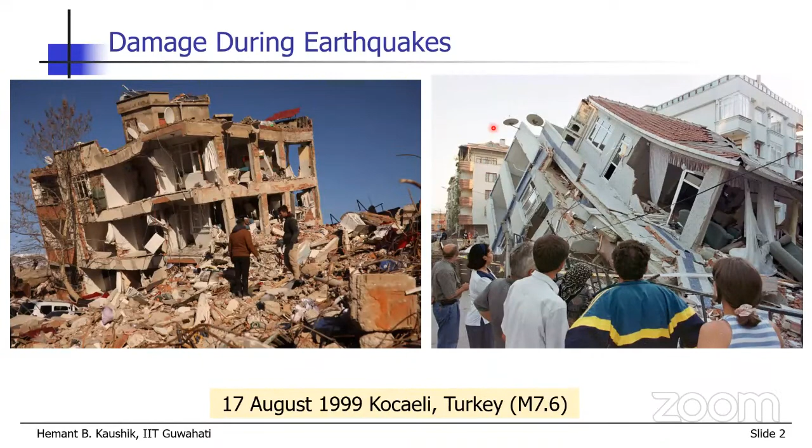Then, along the same lines, in 2001, our Bhuj earthquake opened our eyes, as if we were thinking that such big earthquakes cannot happen in India. But then this earthquake resulted in, again, a lot of development in many aspects in the country.

Then happened a very large earthquake, one of the biggest earthquakes that humans have experienced so far, magnitude 9.3, this earthquake in Sumatra. The earthquake was so big that even some buildings in Port Blair, which is about 1100 kilometers away from the epicenter, collapsed. Plus, there was huge damage to infrastructure.

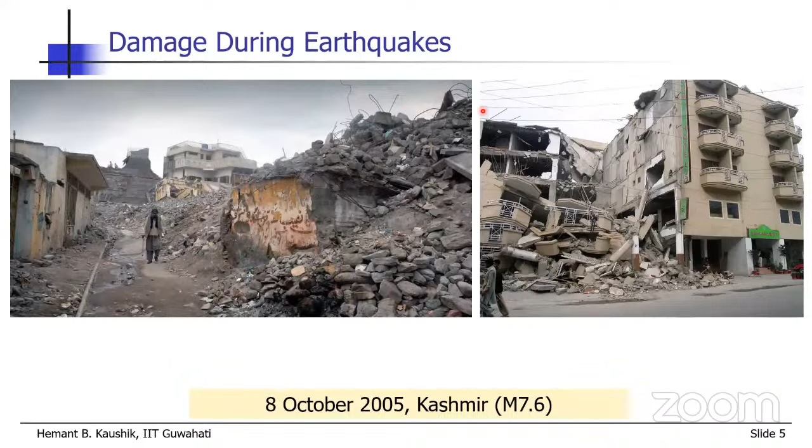Then in 2005, another big earthquake occurred in Kashmir, and we saw what happened to all these unreinforced masonry buildings and even the apartment buildings, similar to the Bhuj earthquake.

In 2006, there was a very small earthquake in Sikkim of magnitude 5.4, which was followed by a bigger earthquake of 6.9 magnitude in 2011. So we covered both of them, and the structures which we identified as vulnerable in 2006 were all highly damaged during this 2011 earthquake.

And in 2015, Nepal, you see there were two earthquakes, but on 25th of April, the 7.8 earthquake created havoc to all building typologies, being RC buildings, the unreinforced masonry buildings, even some of the local typologies and heritage structures - all were damaged to a very significant extent.

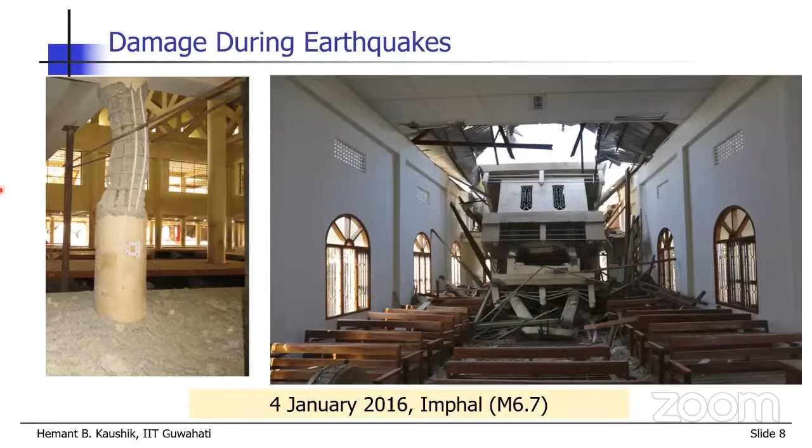In Imphal, there was an earthquake of magnitude 6.7 in 2016. That resulted in huge damage, even to this very famous women's market in Imphal city. And this is the church building which got damaged.

This was followed by a very small earthquake, not in terms of magnitude, but in terms of effect. This was in Assam, Sonitpur, in 2021. Though the local magnitude recorded was 6.4, the damage was not much, but there was huge liquefaction in the area. You can see the liquefaction that occurred in a large stretch of land near the Brahmaputra banks. Otherwise, the structural damage was very limited during this earthquake.

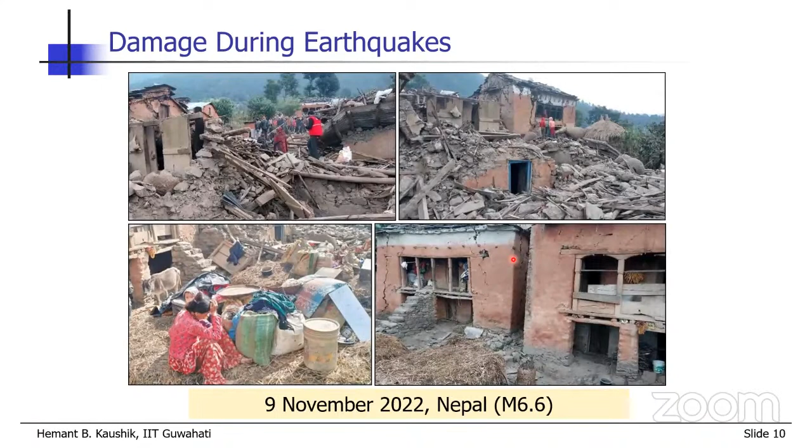In 2022, another earthquake occurred in Nepal, magnitude 6.6, which resulted in huge damage again to unreinforced masonry buildings, all sorts of unreinforced masonry buildings. And finally, this 2023 double earthquake occurred on the border of Turkey and Syria. The location was different than the 1999 Turkey earthquake, but the damage, the death toll, the economic damage was huge, comparable to 1999. So the question now people are asking is what they have learned during this last 24 years.

I'll ask a different question. The question is, which buildings have performed better during these earthquakes? We have seen hundreds and thousands of photographs of building collapses, of huge damage to different infrastructure. But are there any buildings which have performed good?

In Turkey, for example, there are many vernacular housing systems. Out of them, particularly two systems perform better compared to reinforced concrete buildings and unreinforced masonry buildings. These are the Himiş construction, both of them. You can see the difference here - these are unreinforced masonry buildings otherwise, but they have large numbers of timber vertical and horizontal elements, as well as bracings, the diagonal elements. In between these timber elements, the wooden elements, they fill the masonry with different types of material. It has been found that these buildings performed better compared to other buildings, so the damage was limited.

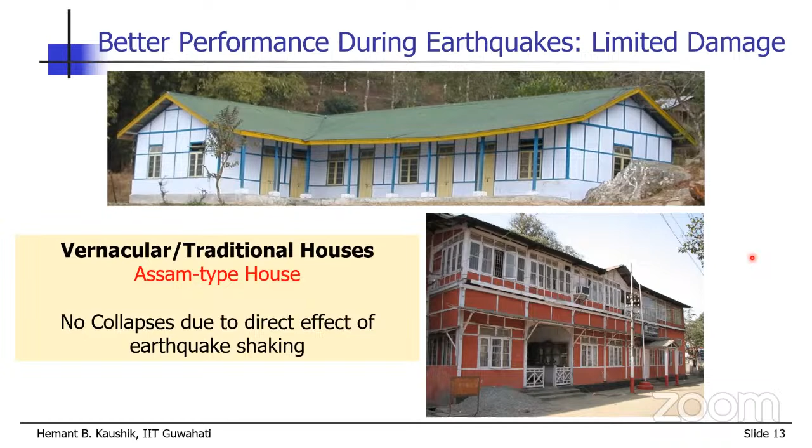Here you can see the comparative damage to this Himiş building versus a reinforced concrete building. Assam type housing, found across the Northeast, is the only building type which has not seen any collapses in its history. There is no documented evidence of these buildings collapsing due to the direct effect of earthquake shaking. Though there is some damage, which I'll discuss later. These are very minimum, negligible damages that these buildings suffer because of the direct effect. When I say direct effect of earthquake shaking, I mean there are some damages and collapses reported because of landslides or flooding, but not because of the earthquake shaking itself. You can find single-story and multi-story buildings of this type, large numbers across the entire Northeast. So these are the only buildings that have not seen any collapses.

Now, which building types are most common? Looking at several photographs showing how different buildings have performed during different earthquakes, what we see is masonry is the common construction material in all these buildings. In India, we have the majority of the building stock constructed using unreinforced masonry (URM), and there are many reasons for that - they are easily available, economical, among other reasons. So in any city in India, developed or developing, we find masonry there.

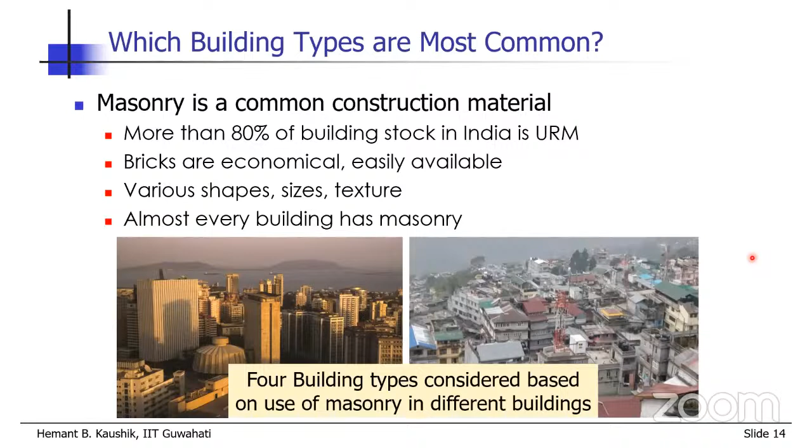The first building type that I considered is, of course, the masonry infilled RC frame buildings, which all of us love a lot. Second is the unreinforced masonry buildings, which all of us have simply forgotten, in the sense that the good construction practice has been forgotten, but of course we are constructing these buildings.

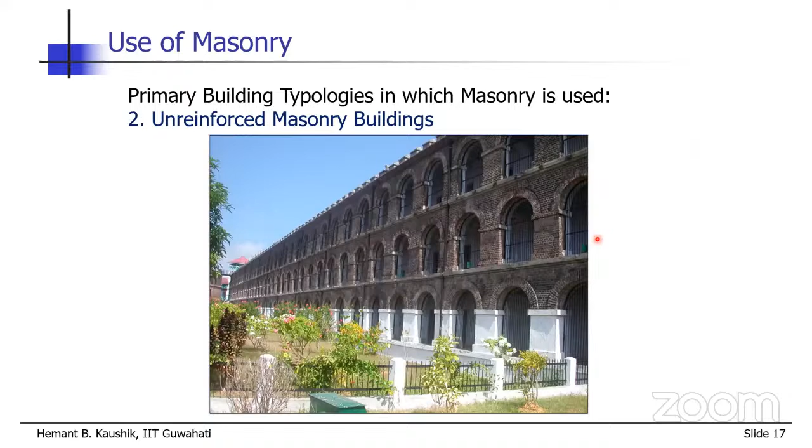The third type of building is the confined masonry buildings, which are very popular in some of the countries where earthquakes are very common. For example, Chile and some of the European and Latin American countries. These buildings have performed really well during these earthquakes. But I have not shown these buildings as better performing in Turkey and some Indian earthquakes because they are not commonly constructed there. And finally, the fourth type is the traditional vernacular building.

Particularly Assam type or the Ikra houses that we will consider. Here also the masonry is used below the sill level, so only this part is masonry. Though there are some other systems, the Dhajji-Dewari and Taq, compared to Ikra type houses or Assam type houses, these buildings have not performed that well, though they performed better. So we'll just consider one traditional building type, which is the Assam type house.

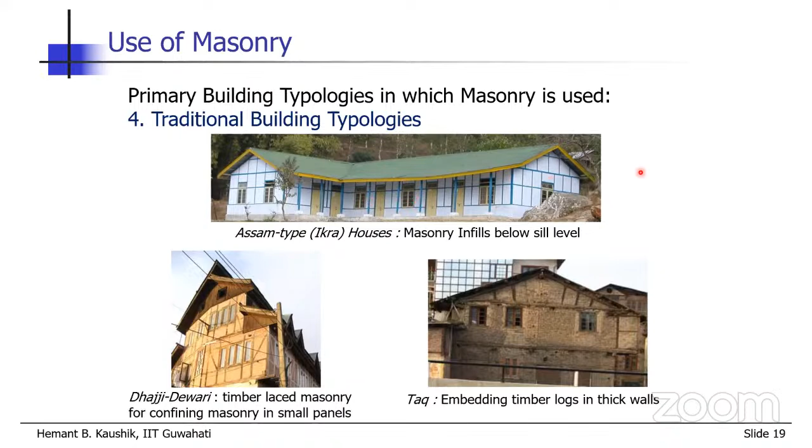We have done large scale testing of many building typologies, all these four and then some others, but I'll show results for four. I will show you some test results, not in terms of numbers and mathematics, but in terms of how they perform, some of the videos. Then we will compare how the strength is, how the lateral drift is, how the lateral strength is compared to the other building systems.

This is how we tested this wall. Basically, slow cyclic testing loads were applied at the slab level of this frame, and a lot of sensors were used to record the performance. Let us see this video, how this frame, single frame with full infill, performed.

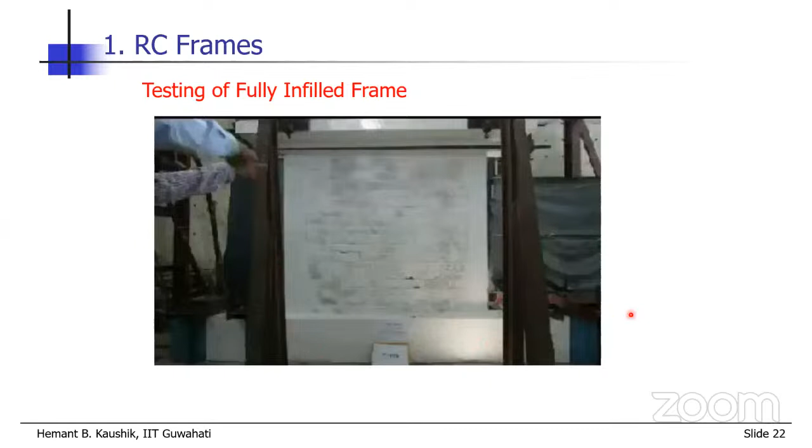The loading is applied here, and it was applied very slowly, so that it takes roughly 2.5 hours to complete the single test. But I will be showing you the video in very fast forward manner in about 30 seconds.

If you can read this number, it shows how much displacement is applied at the top here. You can see the cyclic loads are applied. Basically, we are applying the displacements. Here we have applied so far 20 mm displacement at the top, meaning 20 positive and 20 negative, so this side as well as this side.

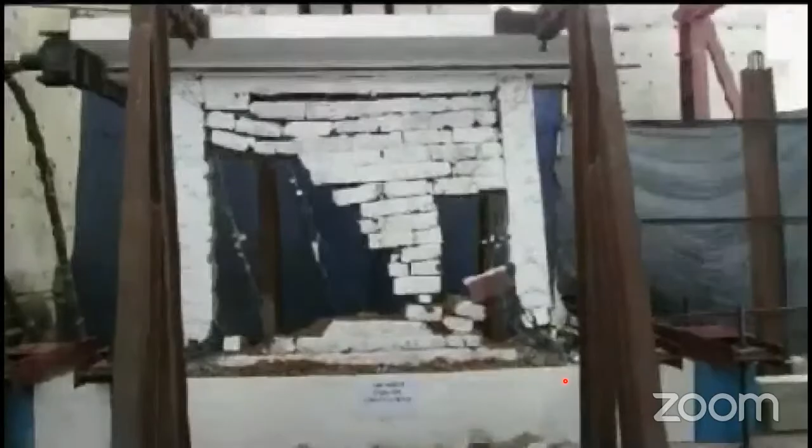You can see here immediately within 20 mm, 30 mm, you have huge cracks in the walls. There are some cracks in the columns, beams. At 40, 50 mm displacement, you will find that these columns will actually damage so much that all the concrete will go away. Now the wall will also start collapsing in the out of plane direction, and the entire concrete has fallen off from here. This means all the bars have yielded. Finally, what you get is, of course, we have supported this frame in the out of plane direction so that it is not collapsed.

Now if you compare this with the infill frame, obviously you will get very high stiffness and very high strength, but the ultimate displacement at which it fails is actually reduced drastically. It fails at around 4% drift. But in case of bare frame, even at more than 5% drift, the strength was not reduced significantly. With a significant opening, of course the strength reduced compared to the fully infilled frame, and the failure occurred early.

Remember these results, we'll come back to them when we compare all 4 building types.

So the next type is the unreinforced masonry buildings. Again we consider first the 3 walls only. These are not buildings, but only 3 walls. First is full, there's no opening. Second wall is basically with a door opening, and third is a window opening.

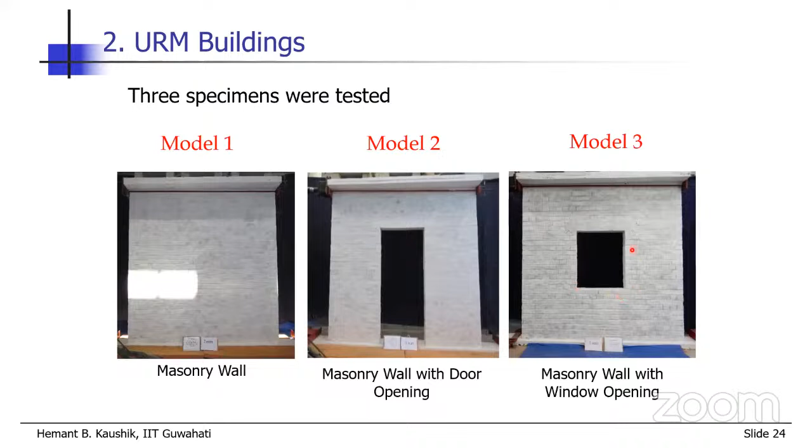Now you'll find this video very interesting, let me see if you can find any damage in this wall. The same setup is there. We are applying displacement at the top, and the displacement is shown here. It is expected that cracks will start emanating from this region or this region and at the bottom, because...

...this is the region of high stress concentration near the opening. So we have reached about 4 mm, so far there is no crack. But if you remember the RC frame infill, there were cracks even at 4-5 mm. Here you can't see any of these things, but then immediately there is a failure.

I'll show you why I'm calling this failure. You cannot see actually anything, any damage or any deformation of the wall. That is because it simply failed at around 8 mm displacement, which is so little to observe, particularly in a small video, you cannot observe it.

More interestingly, there is no ductility here, it immediately failed. So it was a very brittle failure, immediate failure. So here we are showing this wall. It failed at around less than 6 mm displacement. We're not talking about drift here. And this is a full scale wall, 3 meter length, 3 meter height.

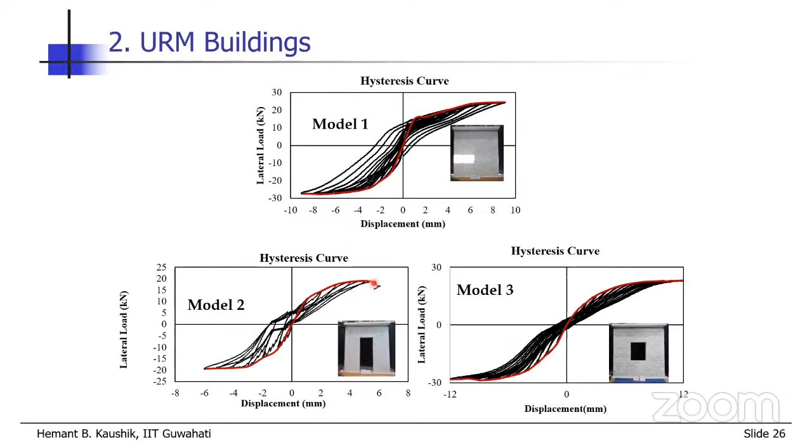Then what we did, we tested the entire building. It's a full scale building and it had 4 walls. 2 walls were having window openings, 1 wall, this front wall, has a door opening. So let us see how this building performed.

The same test setup was used. The displacements were applied cyclically at the slab level. This video shows that we have applied 19 mm displacement so far, and you can see the rocking behavior that is occurring in this wall.

Rocking means this part of the wall is actually dancing over the bottom part. That is because the continuous crack that has happened along the whole length of the building at this level, starting from the opening here. That is what I was mentioning, because this is an area of high stress concentration, we generally expect the cracks here. Also you will find some cracks here at the bottom, that is also very common.

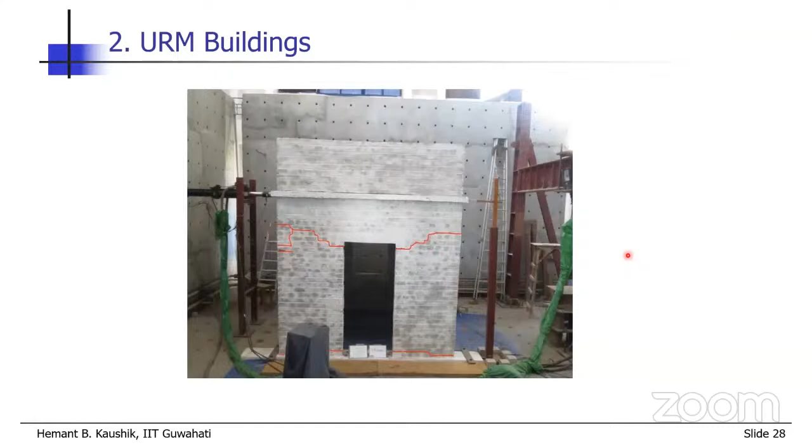So when you compare a single wall with the entire building, at least you can see some of the displacements. So people will get some time, but not as much as we find in case of RC frame.

So the third building typology is the confined masonry. I'll just spend 2 minutes to explain what is confined masonry to those audiences who have not heard about it. So here is the RC building with infill. What we do here, we construct the frame first, RC columns and beams and slabs, and then we fill these open spaces in the frame with masonry infill.

So when we do that, we don't expect that these masonry walls will resist the vertical gravity load that is coming on the slab, because these beams and columns are designed for that purpose. Also, we don't expect that these walls will resist any of the other loads. We don't design them for that purpose.

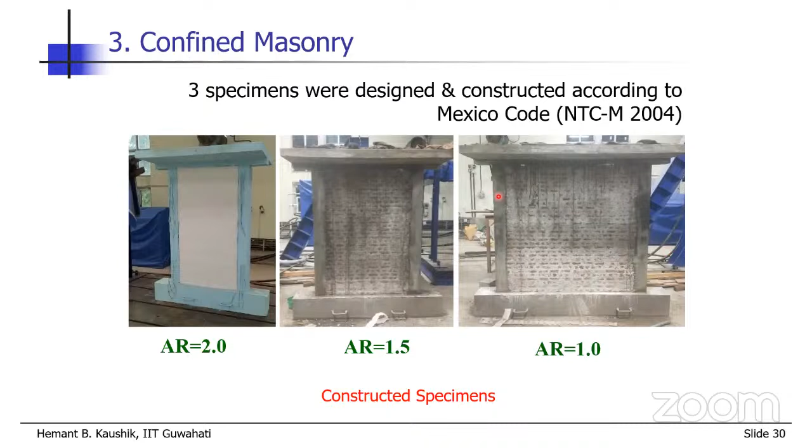I'm showing you results for one specimen for aspect ratio 2. Here you can see lateral drift 0.75%, 1% lateral drift we have already applied. Looking at this, the performance-wise, it appears to be quite similar to masonry infilled RC frames. But when I say similar, that is a very big statement, because these columns are not designed to behave in a ductile manner. Still, I'm saying similar. So that carries a very large weightage.

Now let us see how these frames perform. These are scale frames, not the full scale. So these are 3 frames. You can see that when the frame aspect ratio is reduced, the damage scenario also changes completely. And that is why we tested 3 frames.

Finally, the Assam type wooden housing. So we first tested some frames of these buildings. The first frame is without any infill.

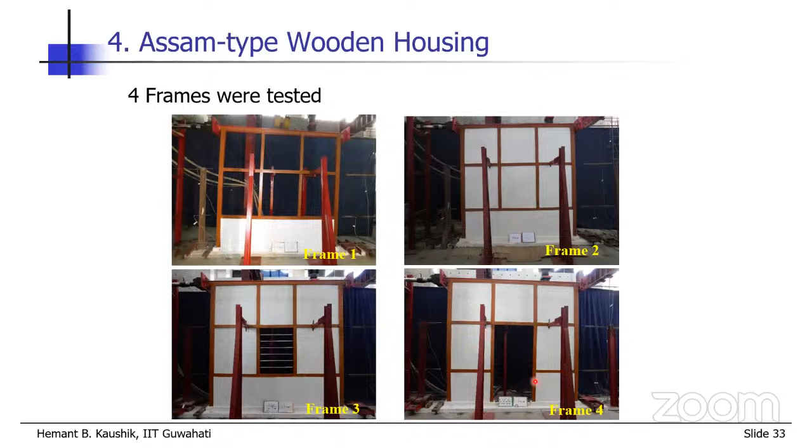Just to see if there is any influence of these Ikra walls, this infill, on the overall performance of the wooden frame, we tested these 2 frames. Then we inserted one window opening and again a door opening. Similar testing was carried out.

Let me show you this video again. What I want you to please concentrate on is this connection here, the vertical alignment between these 2 members. You can see what happens to that alignment when I apply the lateral displacement here. Plus, remember, this is a normal masonry infill wall, and these are the bamboo strips, Ikra. So just compare these two walls.

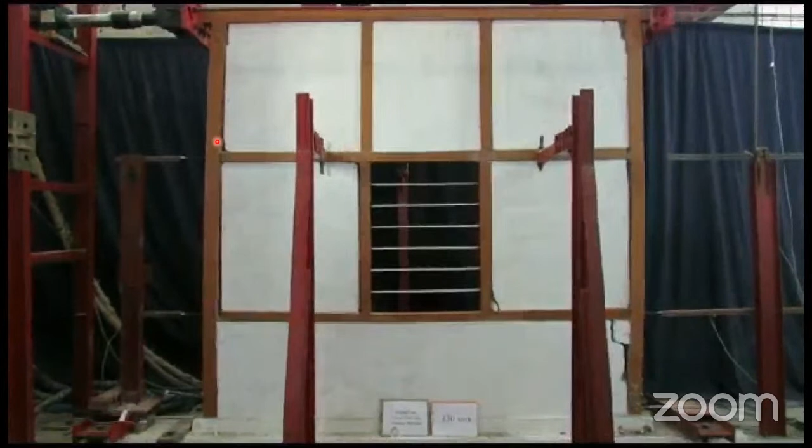Then you see the video. So we have already reached about 20 mm, right? And at this 20 mm displacement, you can find our masonry infill wall has cracked, which is expected. But there is no other crack, no other damage to the entire frame. Though there is some separation here at different locations, that is fine. So there is some small crack here because of large separation.

Look at the displacement. We have almost reached about 140, 150 mm, which is huge.

Again, this is a full scale frame, height is 3 meters. Now you can see the Ikra wall, how does it look like? These are the bamboo strips. Look at the vertical alignment of this connection, which I mentioned. There is no alignment. The connection is broken because it was so weak and flexible, using only nails. So the point I'm making is these buildings are really flexible.

They allow displacements, and you see up to what drift level we have actually gone with this building, this frame. It loses some strength because of the cracking and failure in the nails, but then the load is redistributed to the other members. Some strength reduction occurs, but then it increases again. This happens all the time, up to 8.5% lateral drift. We couldn't test it further because of our testing limitations, but it was behaving very nicely up to that point.

Compared to this frame, which had no Ikra walls, you can see the huge influence of these Ikra walls on the frame behavior. Then the influence of openings was also studied. The behavior of this frame with a window opening was quite better compared to even the frame without any opening, and the reason was that even the presence of these small steel members enhances the performance.

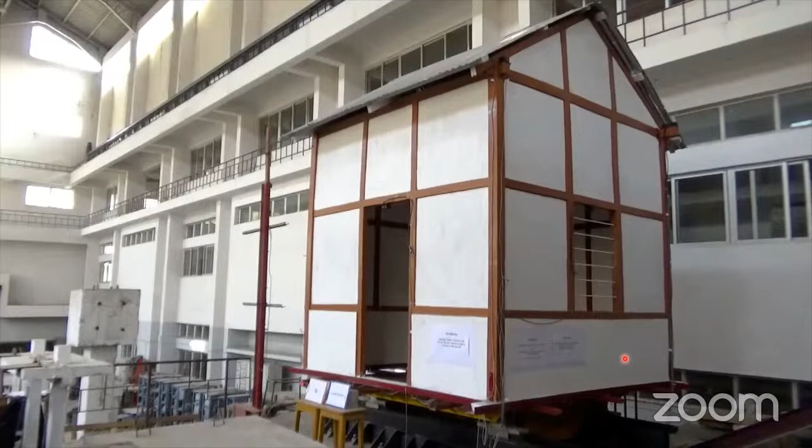Then what we did, we tested the entire building on a shake table so that we understand how these buildings behave so beautifully without any damage during earthquakes. The result I'm showing is for the Taft ground motion, scaled up so that the peak ground acceleration was 1g, which is very high. Let's see if you can identify any damage to this house. It's a full scale house.

It was instrumented at various levels. Accelerometers were placed, and on this side there were LVDTs. Strain gauges were placed at the foundations. At least I don't see any damage to this building from the video, and as I said, this was a very big earthquake, with 1g as the peak ground acceleration.

So what we did, we tested the same building with different ground motions at different intensities. In total, we applied about 112 ground motions, but there was no significant damage. Actually, the damage was so negligible that we couldn't damage that building at all. So finally, we shifted the same house specimen and applied slow cyclic loading, like we did when testing the individual frames.

Then you'll be able to see some damage to this building. The displacement applied at the top cyclically is shown here. This has reached 20 mm, no crack, nothing at all, anywhere, like in the single frame. These are the masonry walls, these are the Ikra walls.

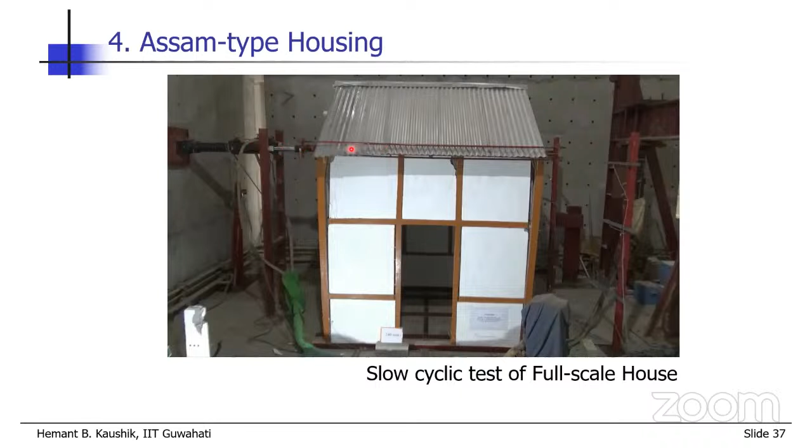Then what we did, we removed this house and changed the setup so that we simply kept pushing this house in one direction for about 500 mm. Then this house actually got damaged. Now you can imagine this height is 3 meters, 3000 mm, and we had to apply 500 mm displacement at the top to fail it. This is a huge displacement.

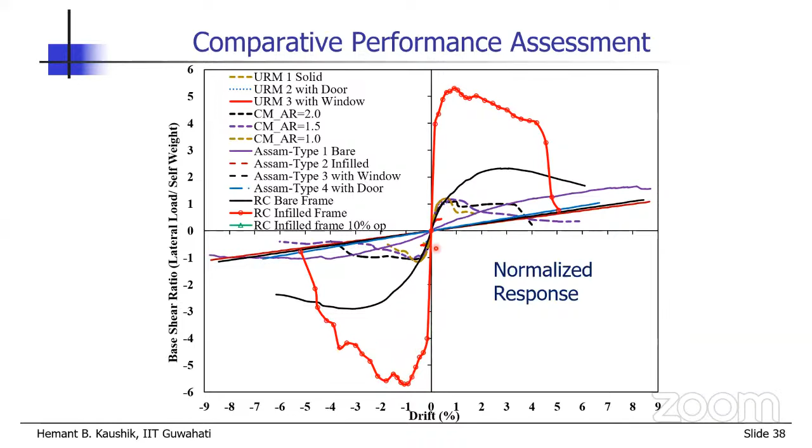And look at where the masonry infilled RC frame is compared to all other building systems. There's huge stiffness, and that is the reason we find immediate failure of these infill walls. As soon as, because of the high stiffness, it actually attracts a lot of loads during the earthquakes. But anyway, because we are normalizing the response, it appears to be quite good.

And this is the RC frame, 10% opening. So these are all the frames that we have studied. And if I ask you which one is the best, it's a very difficult question to answer. But if I ask you which one is the worst, it's the simplest thing you can answer, that these 3 frames, the unreinforced masonry, are not behaving up to the mark. But unfortunately, the majority of our structures are here. We are constructing these, right? So the idea is to at least convert these to the confined masonry, or to this vernacular traditional housing.

So that is all from my side. Finally, the risk mitigation strategies for the future, basically there should be no surprises. What we have to do is improve the construction practice, use construction materials wisely, and follow the design codes.

Now, out of the 4 typologies, which one should we adopt? Well, we can adopt any, as long as we use the design codes properly, use good materials, and the workmanship is good. But unreinforced masonry is not recommended in high seismic regions. We have to use reinforced masonry, and using reinforced masonry is difficult. So there's a concept of confined masonry which we can use.

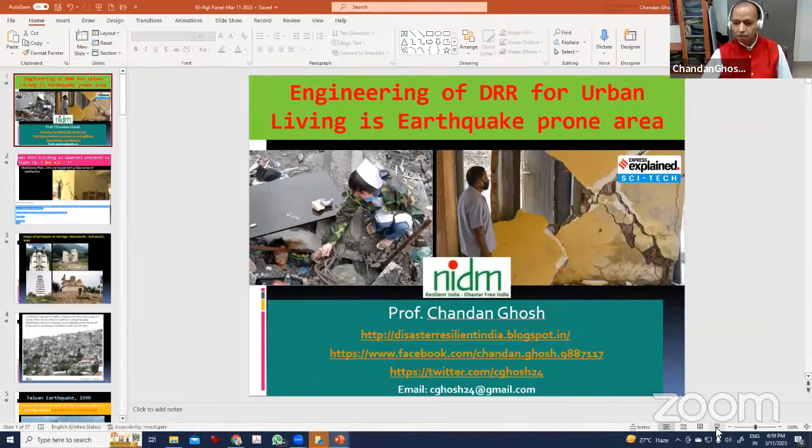Now let me take something on this area. Let me put up my slides quickly. Is the slide visible? Yes, absolutely fine. So the first thing is a photograph of a person, maybe a government official, looking at a structure to see how it has failed, and finding out the reason behind that. Earthquakes can make such an impact on our buildings where we have invested a lot.

Being from the engineering fraternity, we have to keep evolving technology, codal provisions, and guidelines, and all these things that are available, to enforce them and put them in our buildings. That is how we look at it.

So what I'd see is that by looking at buildings after things have occurred, like the Sonitpur earthquake last year, there was some damage but not much. But still, being an engineer, how far are we from the actual performance of the building under the conditions of an earthquake of 6.7 magnitude, and how did this building fail? There is a gap between just seeing the photograph saying it has failed like that. There needs to be a connection set in between, like in the last lecture, the performance, really which one is doing better, through laboratory tests and also field performance.

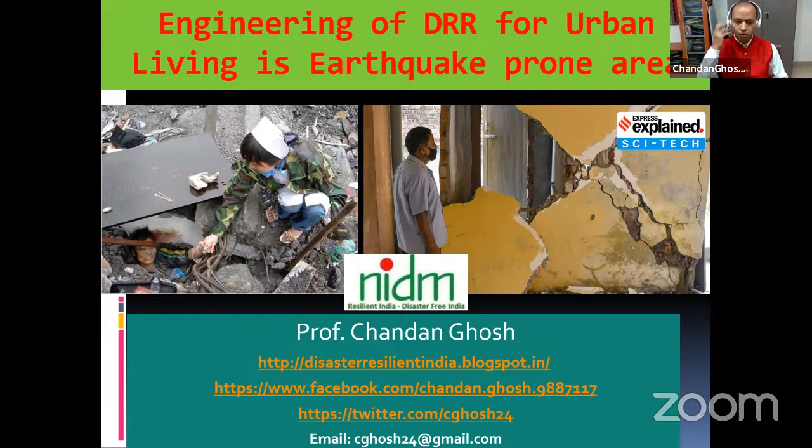So it is not that only from the structural side we are looking at one particular aspect - the structural behavior of the building, and checking whether our design performs safely as per our design. But here, when life is involved, performance is also involved. And then it comes again as an onus on us, how we look at it going forward.

When we see such kinds of cracks, again, there is no formula, no software. To bring a building which is broken in this manner, it is not possible to correlate with any formula or computer simulation that it is going to crack like this. But there are designs and constructions being done which exactly perform the way that it is designed and constructed. So that kind of performance study and tests are also being done.

This is in Guwahati after the Sonitpur earthquake. You will not find any building in Japan without any crack, in fact, because it is the most earthquake-prone area.

But while seeing cracks in this manner, we do not have any mathematics to define how cracks are going to come, or how the displacement curve is going to happen. It is quite impossible, because of the kind of bars, members, connections, filler walls, the entire beam-column junctions, and the kind of reinforcements that are there. We can simply say we have no control on that. We give them in the design, but if it is not placed properly - see the geometry, see the quality - that is the kind of cracks being seen over here.

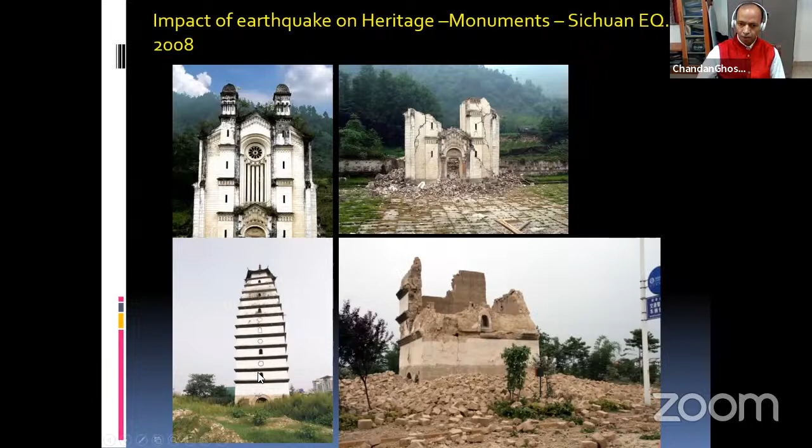There is no such medicine, no such retrofitting tool that can be devised, because the cascading effects and other factors would be very, very dangerous. And since we are not able to fit any mathematical equation from before to after in this way, no stochastic simulation is possible.

The same will be the case for such buildings in Zone 5 areas, because these are steep hills and we cannot do much about it except taking care. Just saying that nothing can be done in a national seminar like this is also not the way to deal with it, because so much investment and public interest is involved, and people are living there.

So in order to safeguard such facilities, I think our research pursuits, experiments, and judgment, along with the huge funding being allocated to each state including Tripura from the National Disaster Response Fund to retrofit a few clusters of buildings in Agartala, the Northeast states, or the entire country including Delhi, our professional judgment as well as the tools and techniques available even globally, there is no complete answer to that.

But we cannot sit idle. That is why we have to check at least the vulnerability of these buildings, especially since individually each building is made with RCC following code and other requirements. But when built in this manner, one above the other, the cascading effect will be really unpredictable and cannot be simulated in any computer.

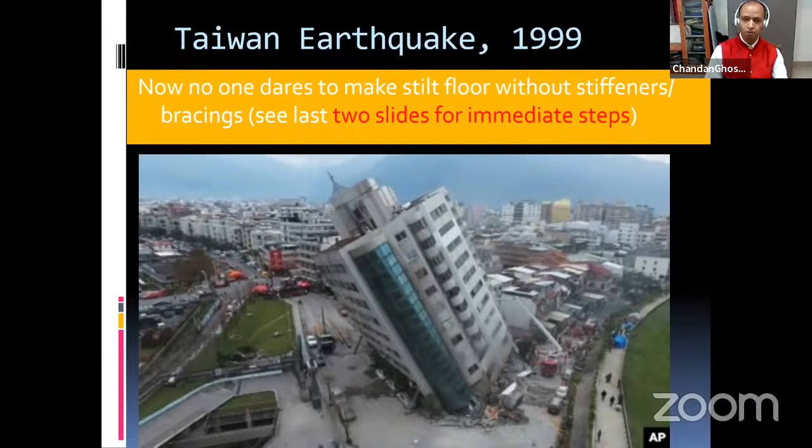Even two decades ago, we never fully recognized these issues - we learn as we go, because today's topic is what we can learn from the Turkey earthquake last month. One thing is, when temples are built in a certain way, we are now sure, both experimentally and through codal provisions, and performance-wise, such structures have a weakest point.

The weakest point is here. But temples are thousands of years old. We can say they have survived because the earthquake waves they experienced did not match their own natural frequency.

That's a very easy and simplest way to give a flowery comment. But what we have to be particular about is that for temple-like buildings where this part is heavier and that part is heavier, the weakest link is in these areas, and how they perform. In fact, after the Bhuj earthquake, even structures 400 to 500 years old collapsed to the ground.

In that case, no mathematical equations or performance study can fully predict it, except that I'll show you some experiments being done on soft story or weak story failure.

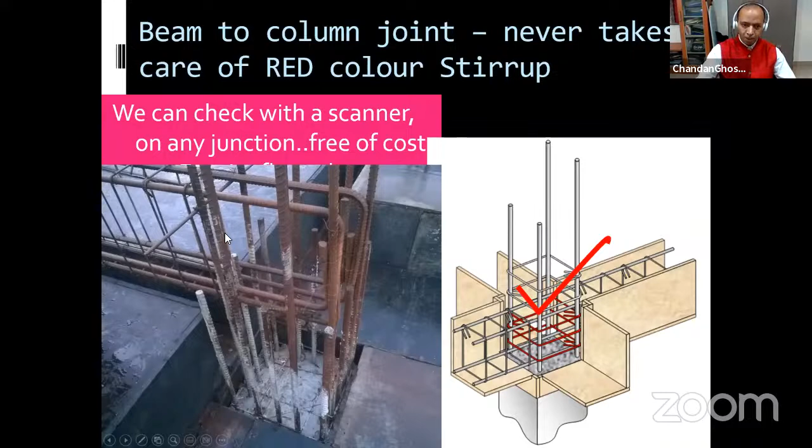In typical multi-story buildings, 10-story, 20-story buildings, see the beam-column junctions and how construction is being done. In many such constructions, if you calculate the amount of steel reinforcement provided, we often give a judgment that let us put extra steel, highest quality of steel. But even when steel is good enough, sometimes more than 2 or 3 times what's needed, putting it in this order or manner is not going to make an earthquake resistant construction. This is repeatedly taught and exemplified in various capacity building and training programs across the country, not only for masons but for engineers also. So this is one point I wanted to highlight.

There are certain publications available on soft ground story construction, and it is very clear how soft story, ground story buildings fail. These are all being shown. For engineers like us, we are not unknown to this kind of thing, but we still go on making such construction with ground story for parking. Thousands and thousands of such buildings have been constructed in this manner only, and they are bound to fail.

I'll show you a plain frame building, a 6-story building, and how they fail while being tested in a robust experimental system, a shake table system.

But now technology has come up that when we cannot remove such structures, and too much expenditure cannot be afforded, then how to frame or place at least a wall, masonry wall, or some kind of bracing, or cut the column systematically and put some vibration absorber. In fact, IIT Guwahati has evolved this, where Hemant Kaushik and the group have been involved in making base isolation devices, with some prototype structures also there. Now directly cutting the column with some system and putting those devices inside can reduce the damage.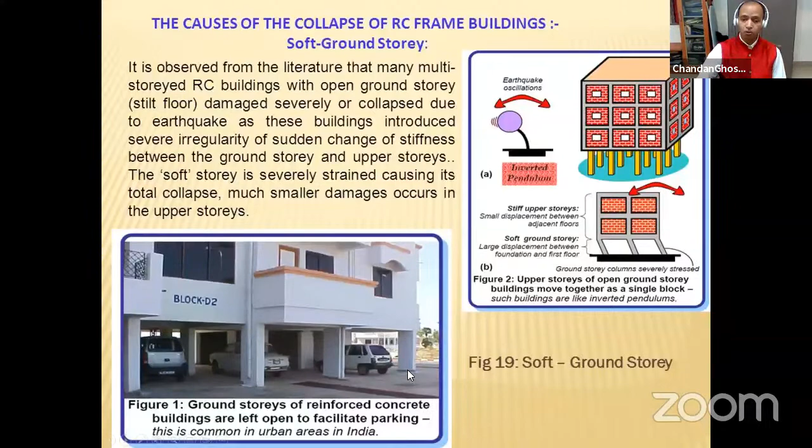This is taken from the BMTPC guideline, a 24-page document that Professor C.V.R. Murthy and his team have developed, showing which configuration will perform better, this one or this one. So this is what is being constructed.

Now, because of soft story, these are the buildings that are highly exemplified in well-known photographs, where cars are sometimes crushed costing more than the cost of the flat. They are being flattened by such kind of failure in earthquake-prone areas. So cars are crashed like this due to soft story failure. We have all these examples, in Guwahati or even in the NCR, Delhi area also. We still continue to make such construction, 10-story, 20-story, 25-story buildings. And we still have the example from the 2001 Bhuj earthquake, where even a 4-story building lost one story.

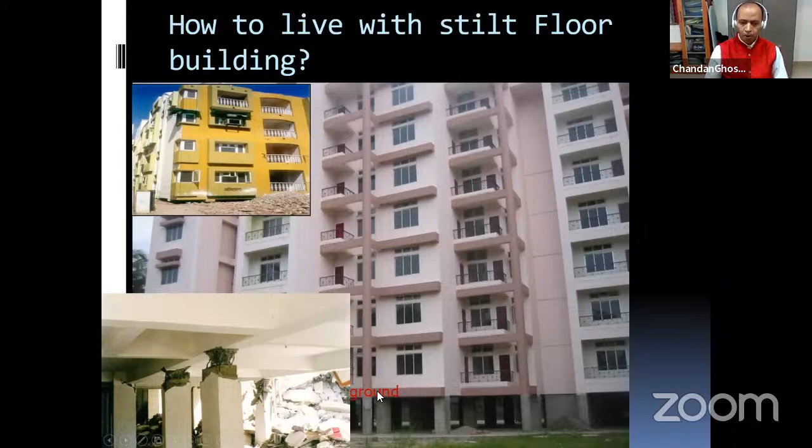At the same time, we go for failure studies too. After an earthquake occurs and a building has failed, we study how it failed, take photographs, and write reports. But there is hardly any method to survive or make arrangements for buildings where this kind of weakness already exists. So how is this to be coped with or taken up? I'll show some examples on that.

This is just a screenshot: buildings on stilts liable to fail by earthquake. And a 6-story frame building, I have taken the screenshot over here. Let me show this entire video from here, showing in a few seconds of time how this kind of frame building without filler wall is failing.

Let us not take it just like that, that an experiment has been done and we simply say, okay, well, it has failed.

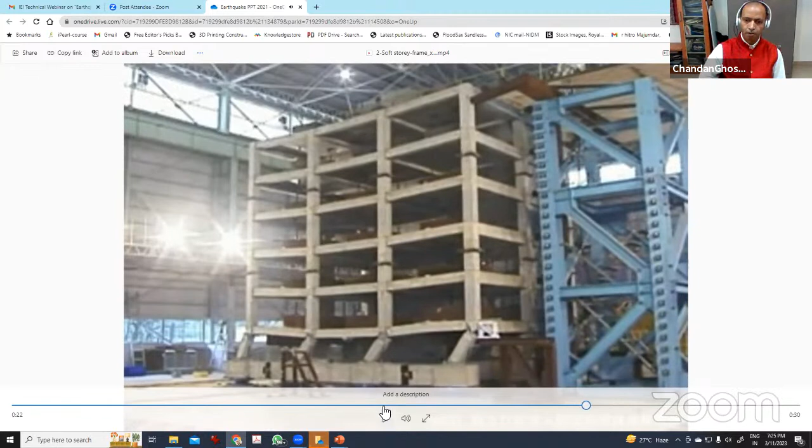See that in a few seconds of time, even without filler wall or filling, a 6-story plain frame building is tested and given a shake at the ground. The foundation is taken as rigid because it's connected to the bottom plate of the shake table. This is a large scale prototype building, and when it is shaken, you see that failure. I have shown a screenshot where all the measurements, reaction frames, and everything is there.

Okay, what happened? Oh, stop the presentation. Yeah, let me share it again. Okay. Oh. I think, where is that? I want to come back to the mode. Okay, is the screen seen?

Just wanted to show how dangerous these can be, but let us not frighten them, how dangerous they are. Let us see that one thing is putting base isolation devices at this column, which are not costly enough. There is another way too, at least making some kind of boundary wall. And here you see how beam and column has to be placed.

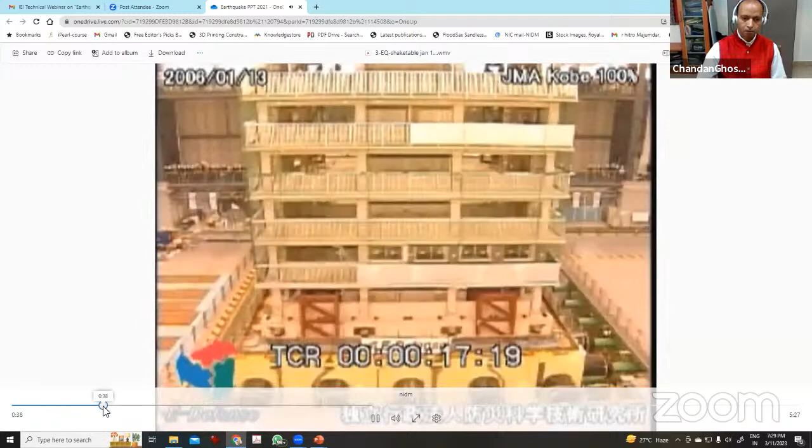All those things have been put up here, and you can see how the building is performing. Let me play it for just a few minutes. I'm going a little faster. This is a screenshot that I have taken.

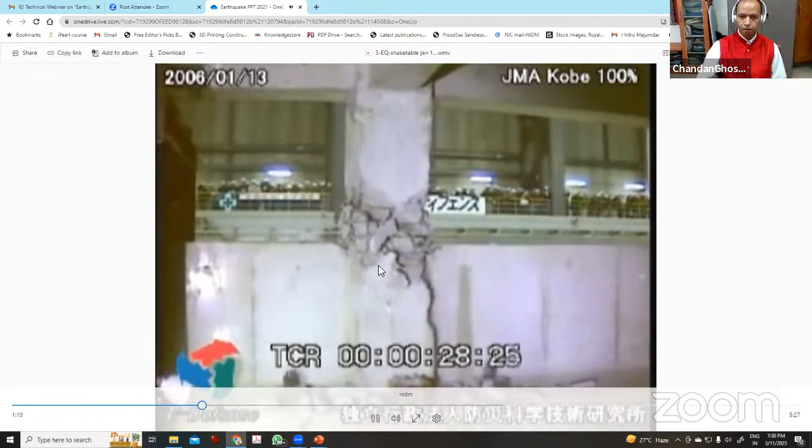See where the failure is happening because of the parapet wall that is given here. There is no formula available; it's only through observation and experiment that we can identify why the column failed here, while nothing happened at this junction. It's because the column, at its standard height, was restrained by this parapet wall from the movement it's supposed to do during an earthquake.

So if we keep a few centimeters or a few inches of gap here, which won't impact the performance of the building, whether it's a school, office, or whatever, so that it doesn't restrain the column, then we can save such buildings. Yes, the structural design was made and the building did not collapse, but you can see overall, see the corner column over here.

This is a shear wall. We forget now, putting shear wall in a 4-story, 5-story, 6-story building. Because about shear wall, we only study it, or some problems are solved, in the 3rd or 4th year of civil engineering. Beyond that, the shear wall concept, or the way beam columns are placed, or finishing is made centrally, remains in the hands of the designer, who has become very much computer-simulation savvy, just putting in input data whatever way they want. But putting shear wall into the RCC building is the designer's design, and implementation at the field doesn't attract much attention.

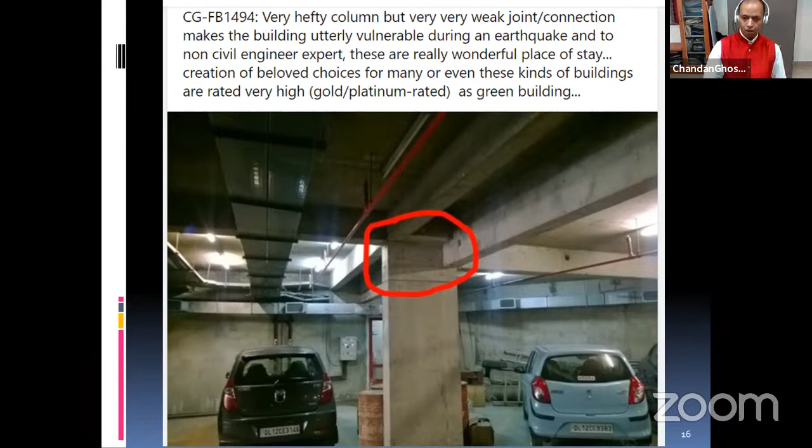And you see the structures that we are making. Of course, these are the numbers you can see in my Facebook, which I try to highlight without pointing to anybody, of those who have made such kind of thing where no columns are there. Of course, design has been made, taking into account not having continuous support of a column in this part, and accordingly, whatever is made, they have distributed the load, and the building is existing.

But such disconfigured geometry, even if enough computer simulation using ANSYS or Plaxis or ETABS calculations has been made, removing a column or making it zero or whatever combination present-day software simulation specialists use, without knowing how they are going to perform, ultimately such blunders will be revealed, which cannot be simulated simply by computer. But when an earthquake does the simulation on such a building, then it will be revealed.

So especially in post-earthquake surveys, generally when the building history is not known, the kind of judgment that we often give can be fallible.

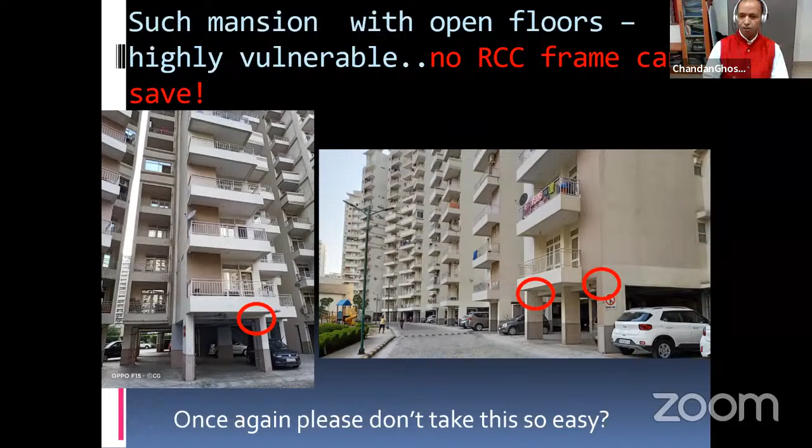Then at least for satisfaction, before going for disaster insurance and other things - which won't help us - unless we at least take such measures. That should be the gateway to taking lessons and small measures which will make a sizable difference in saving such buildings.

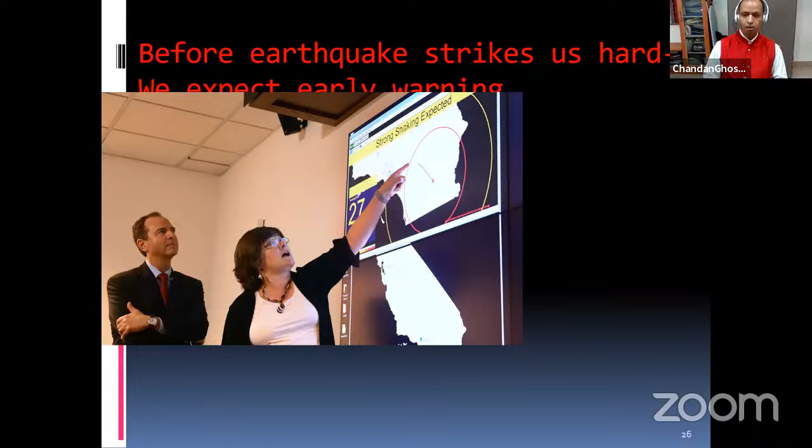So I think it's good, otherwise we're not going to learn much, because there are a lot of constructions, and even early warning and other things - let us not spend too much time on early warning, because 30 seconds or 20 seconds of early warning isn't going to help unless we make our buildings seismically resilient enough.

Because the early warning system needs a lot of development - IIT Roorkee has developed one. In fact, there was an exhibition here at NPDRR yesterday and today, but it's still miles away from reaching the public. But there are certain countries...

The most important part is to identify buildings in many areas and check whether they are seismically qualified or not, rather than just putting up a quake alarm available in the market without a proper reliable background system. With such a system, we cannot simply imagine stopping a train the way Japan has been doing with early warning for more than two decades, and so it is not going to help us.

The first thing is to identify and diagnose the defects caused by faulty construction technique, and also mark and sensitize them. This is our goal at NIDM, along with state governments and everyone, to sensitize people about the kind of defects we identify by visiting constructed facilities, and to modernize our surveillance system using digital construction techniques, taking photographs, animation, and drone surveys.

We have gone far ahead in surveillance, getting every millimeter increment in construction every day or every hour. So we have advanced a lot in that area. But we should not forget that this must be taken with a very strong sense of commitment.

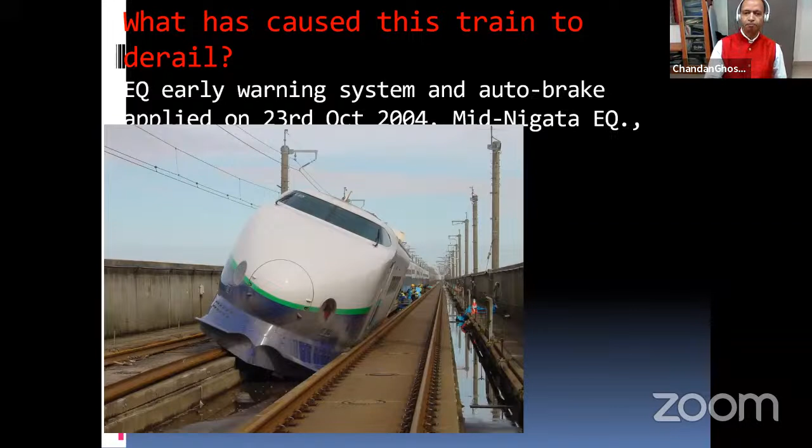Thank you, sir. You have presented the whole thing in a nice and very interesting manner. I really appreciate the interesting way you presented and critically analyzed things, whatever knowledge we are having right now. You critically analyzed the disaster and everything, and provided so many pieces of information, from the technical side as well as the social and policy-making side. We are thankful to you, sir, for your kind and motivated words with this presentation.

So before going to the next session, I actually missed out on your brief introduction. No, it's not really required. It will just take a few minutes. No, it's just the customary thing—others are there, many people. I'm just quickly going through it.

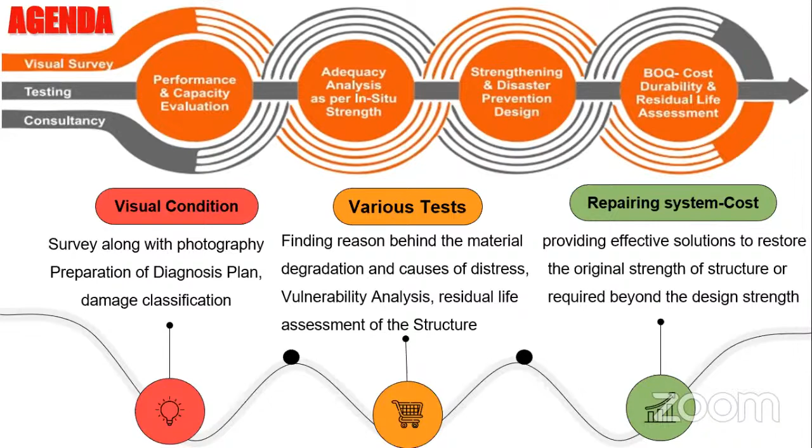They are much more interested in whether it is safe for habitation purposes or not. If it is not safe, how can we make it safe? And if you want to make it safe, how much cost will come and how much time will be required to make it safer? That is the main objective of the client. The client is not worried about which type of diagnosis or model analysis you have adopted. Their only concern is, am I safe inside the house or not? That is the main objective of all authorities, all clients, even the government.

So actually, from the diagnosis, we start with the characterization of the building and the type of members. For example, if it is an RCC frame, or a composite structure, unreinforced or steel structure, or it shows random behavior of the structure. For example, at the plinth level you have adopted the RCC frame, but at a later stage you have used only composite steel structures, so their behavior will be different.

Even in the roof, the flexure member type, whether it's an RCC roof, RBC, brick wall, arch, jack arch, or dome, their behavior will be different. So we have to identify the load bearing member which transfers all live load through the vertical member to the foundation, as it can be different. And when we analyze the horizontal member, the flexure member, the analysis will be different.

Because when we are talking about masonry structures or unreinforced masonry structures, in general, most of the critical or catastrophic action is a result of outplane failure or inplane failure. Outplane failure is mostly related to the type of roof, whether your roof is flexible or rigid. It will define the failure.

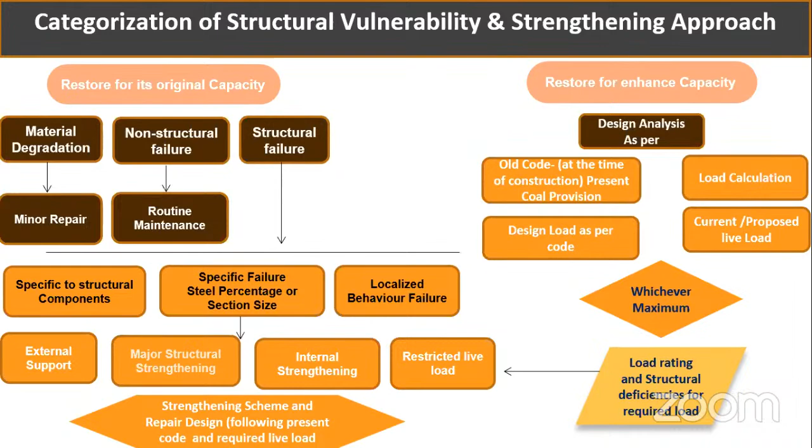So now I'm coming, sir, to the 4 parameters: first, visual condition, material characterization, structure analysis, then repair and DPR.

Now why is diagnosis important? Diagnosis gives the cause analysis. Second, diagnosis gives the volume of distresses, how much area is corroded. Sometimes you can't see the corrosion happening inside the structure, but through certain tests you can identify hidden corrosion inside the concrete where it is not visible.

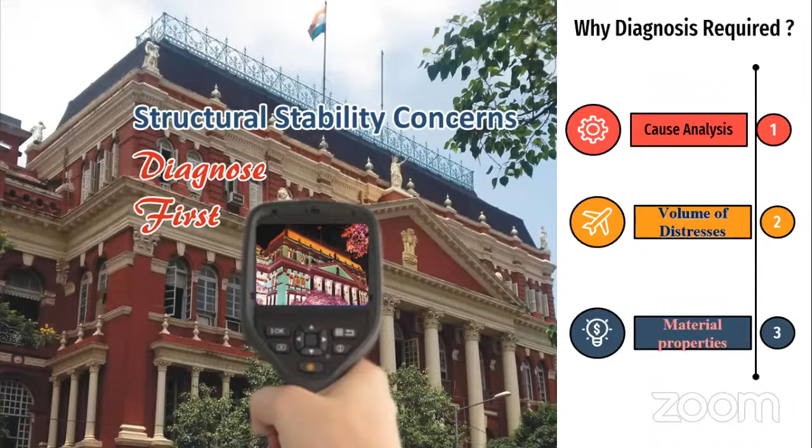And the material property - if you want to know the material property as of present date, for example grade of concrete, steel percentage, stirrup spacing, section size, foundation details, whatever you need for the model analysis, all kinds of data can be generated through the diagnosis system.

Now sir, this is generally the final solution we give to the client. We give you the periodic maintenance system to minimize the deterioration rate. You need the retrofitting cost with detailed BOQ, material specification, rate analysis as per the optional retrofitting scheme, as per client budget and upgradation requirement.

So optional retrofitting is, for example, I don't want to upgrade as per seismic because I know I can't upgrade it, but still I want to upgrade it for the live load, so the repair scheme will be different. If you want to just keep the structure for only 2 years, but after 2 years you want to demolish and reconstruct the new structure, the repair scheme will be different.

So as per client budget, we generally define - even if you want to upgrade 100% of the building for the new codal provision, I can define that vulnerability index: which column and beam should be strengthened in the first budget, which section or floor or type of member should be upgraded in the next budget. So that vulnerability index can also be defined.

And finally, we issue the structure stability certificate. Structure stability certificate is not for seismic load. Generally we define and maintain in our clause that this structure behavior will be in this pattern for this kind of that much load.

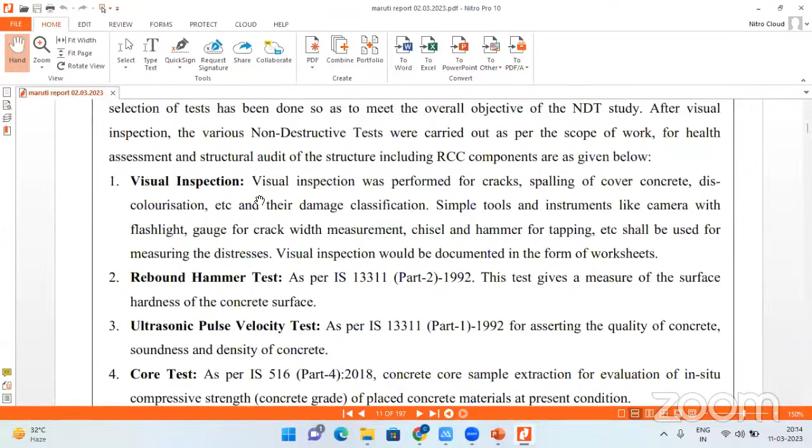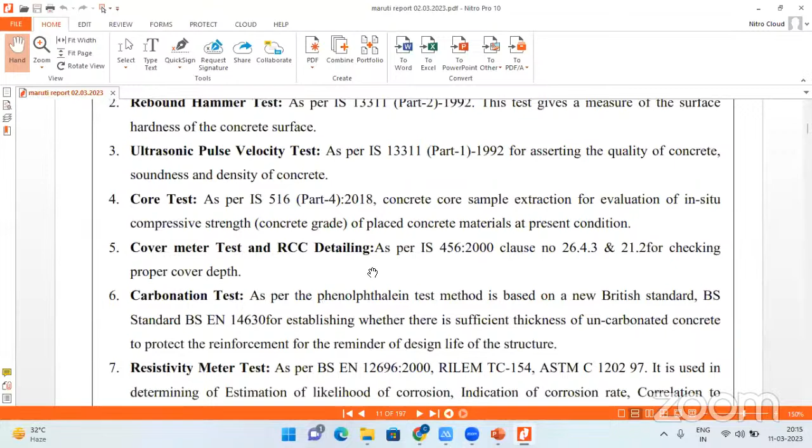For diagnosis, we adopted first the visual inspection. For the rebound hammer, we can't extract the core from all locations, so for correlation with the core test, we adopted rebound hammer. Ultrasonic pulse velocity was adopted only for density and porosity inside the concrete. Core test we adopted for grade of concrete. Cover test for the minimum protection of the reinforcement from fire - that's the purpose we use the cover test.

Carbonation is only for the deterioration factor from environment - because it's a car shop, we adopted carbonation testing for the effect of carbon dioxide on the concrete. Resistivity for corrosion, pH test for the original type of water used in construction, so we can determine the corrosive factor present in the original concrete.

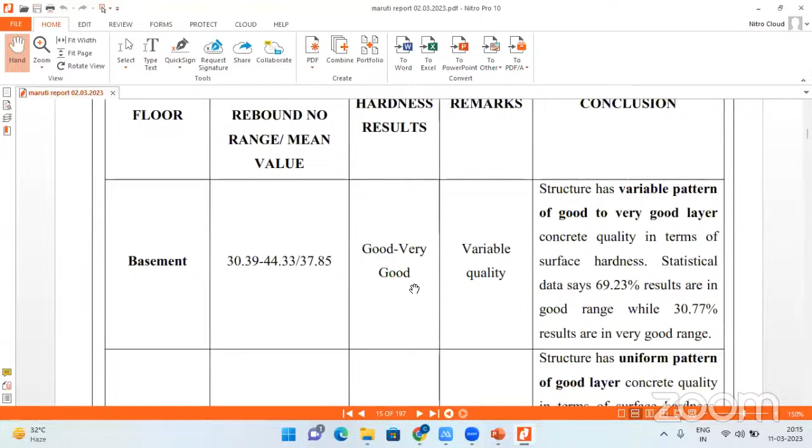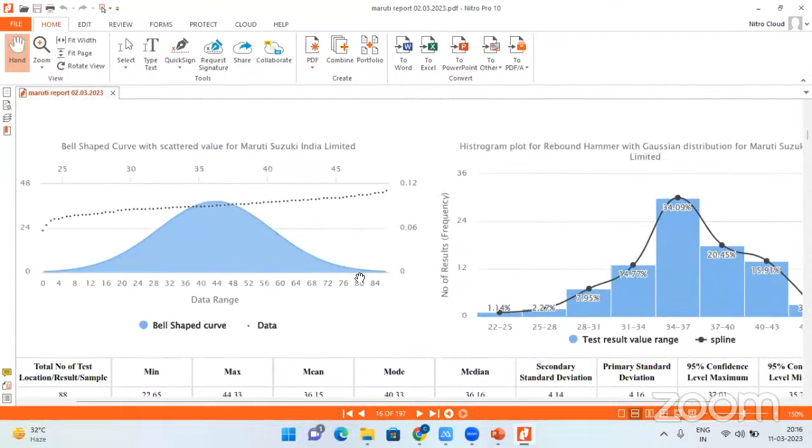So we started this kind of test, and this is the code - you can see the criteria, good to very good, the hardness index, variable quality or uniform quality. We adopted the statistics form - this is the pie chart and histogram. For that, we can try to understand the nature of the behavior - whether this is uniform concrete material or variable, or whether at different levels in different members they have used the same concrete, or the concrete grade is changing with respect to floor or type of member.

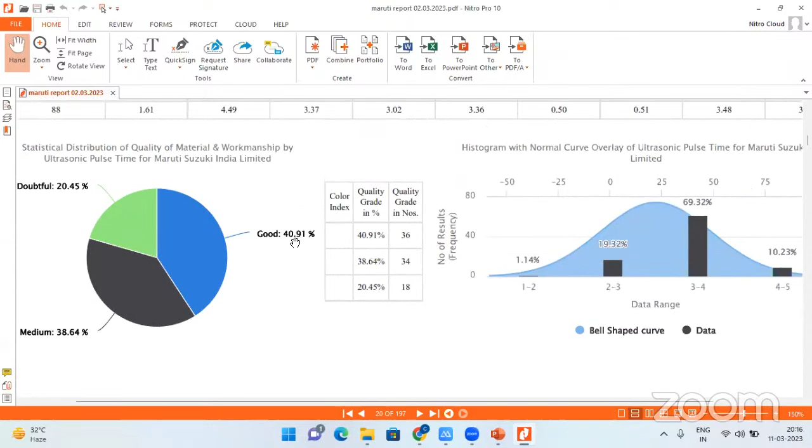And what is the coefficient of variation? For the UPV also, we try to find out the porosity and permeable nature of the concrete - this is on the doubtful to good variable quality scale. So we have plotted this - there's 40% good nature quality, 20% doubtful, and medium is 38%. So this way we have done a lot of statistical analysis.

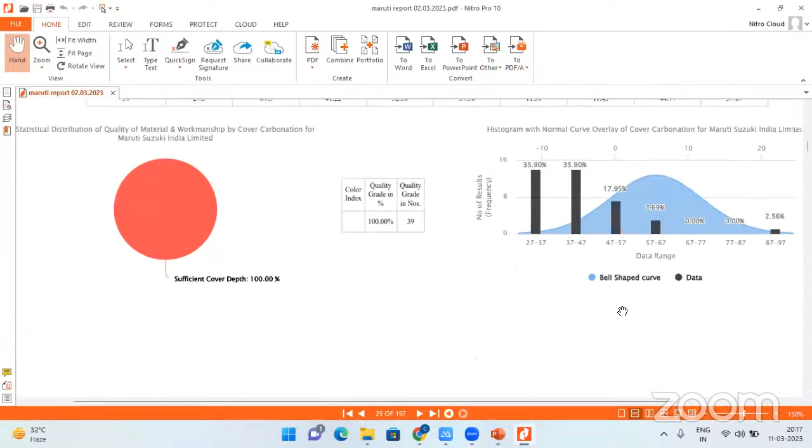For the grade of concrete in the basement, we have M20 to M25. For the ground floor it's M20 to M25. First floor we have the M20 grade of concrete. Same way we have done this for all floors - this way we generated the data related to all material characterization or material properties for the analysis purpose.

So now we can also generate the drawing. If you don't have the drawing, we have a lot of GPR, hand GPR, and laser systems, and by using those diagnosis systems we can create - not 100%, but at least 90% - the equivalent structure drawing related to the building. This way you can see we have generated RCC details for the column, for different types of columns, the size and diameter of reinforcement. Even for the beam we have this now.

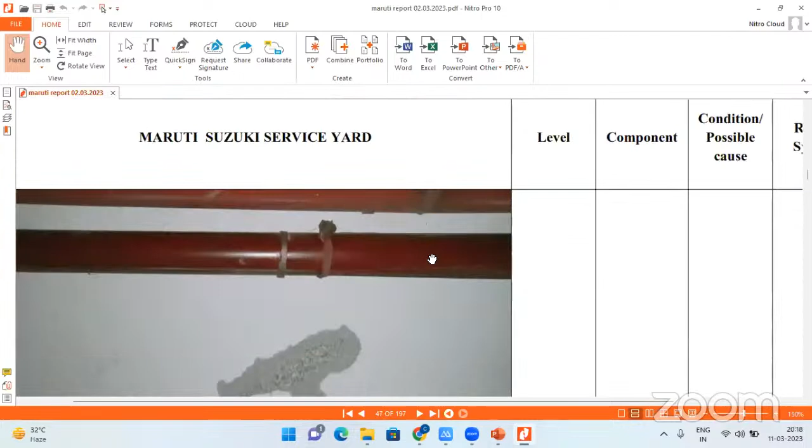This is the visual survey. You can see the type of crack - this is general spalling, this is dampness and localized corrosion.

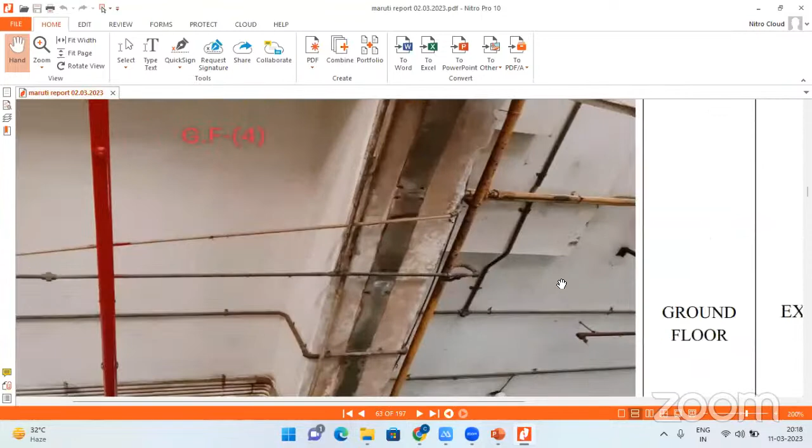Now we are coming to one - this is a crack in the column, now the dampness near the bathroom, and I'm coming to another one - the spalling, so there's a failure in the nature of the expansion joint. You can see the crack between the joint masonry and the beam, due to the incompatible nature between the brick and the concrete. And this is a corrosion crack in the column, and similarly you can see the spalling of the concrete on the recent floor.

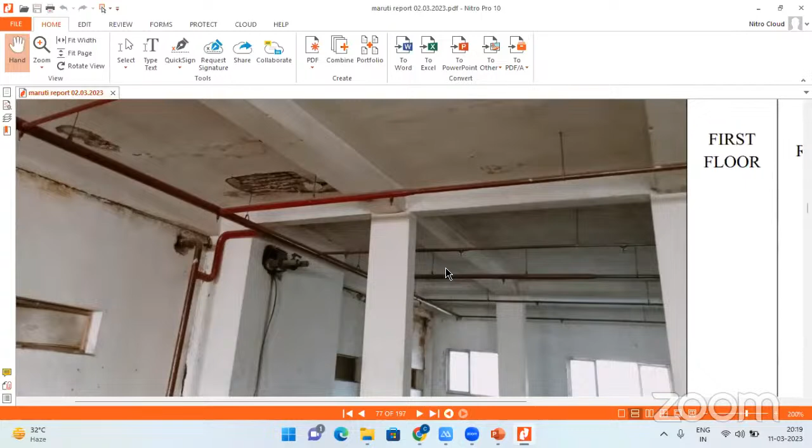So this is, you can see the corrosion and the loss of reinforcement and diameter of reinforcement in the slab. So such ways, sir, actually we do the investigation and try to find out the region where there's corrosion or spalling, and why it is not uniform. Using the different chloride content, pH, dampness, or identification of continuous channel of water, we generally try to figure out the reason behind all kinds of distresses.

You can see here, near the expansion joint, there is a lot of corrosion in the beam. These areas are where the bathroom area is, you can see the seepage. So this is generally the condition assessment.

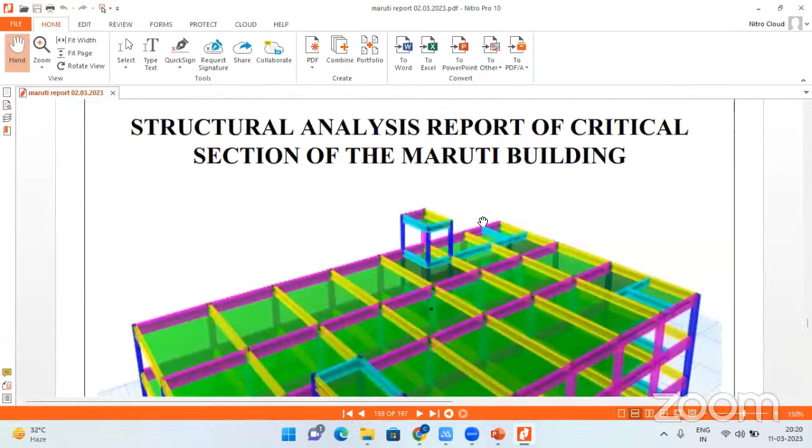Now I'm coming, sir, on the model analysis. This is our structural analysis report for the critical section of Maruti building. We have not analyzed the whole building, but only one region which was separated by the expansion joint. So, sir, we have also constructed at the same location the water tank load, staircase, column, frame, whatever the original operational load. We have also mapped the floor load at each floor level, that load was imposed at each floor level.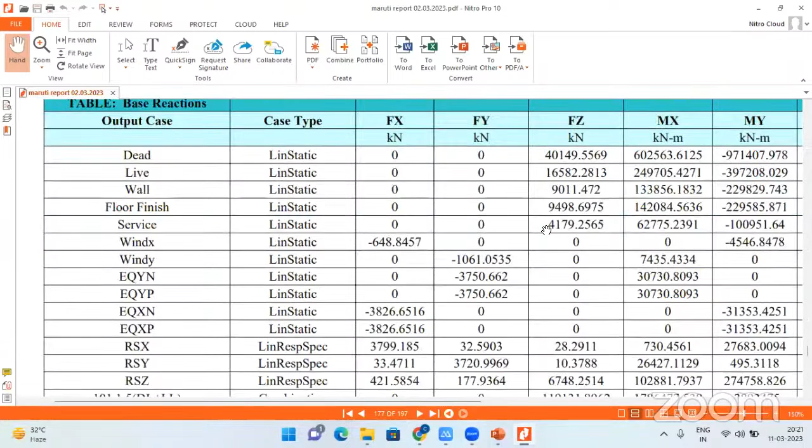And sir, then through the analysis we have imposed the type of load combinations. And from these load combinations, we generated the base reaction. From base reaction, we analyzed the foundation capacity, bending moment diagram and axial force diagram. From that, the lateral forces will also be imposed as per your geographical details.

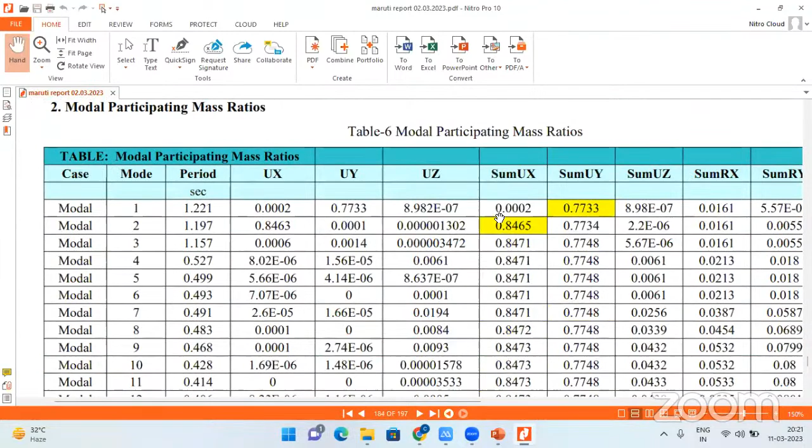And on that basis, sir, you can see here the modal mass we have created. And on that basis, sir, at the last we have checked the drift check. So you can see at the terrace level, these are failing in drift, and the first floor also, but the ground floor is passing, and multi-level is also passing. And this generated the maximum story drift. Which column and which beam is failing is already highlighted with different colors. And this we have also analyzed in terms of demand and capacity ratio.

And this is the executive summary. So you can see the column, beam, slab - this is deficient in reinforcement, no, for only dead load and live load. And structure demand of repair is not required if we analyze and release the structure stability from only the dead load and live load purpose.

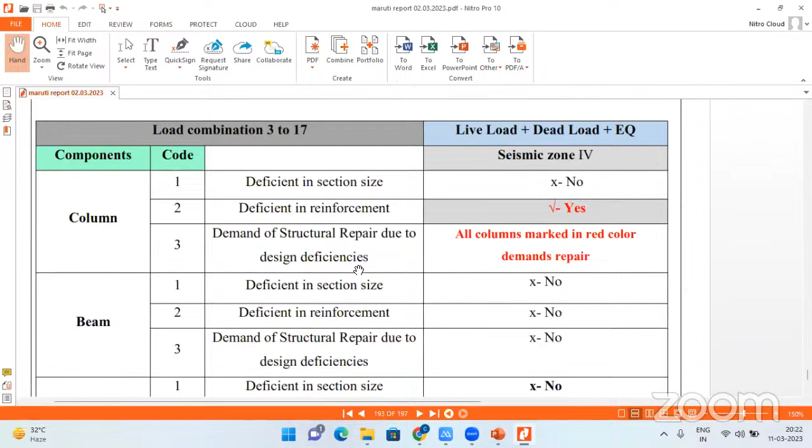Now, sir, if I come to live load, dead load and earthquake purpose, you can see here column is safe, deficient in section size, no, deficient in reinforcement, yes, demand of structure repair due to design deficiency - all columns marked in red color demand repair. And deficient in section size for beam, no. And in the slab, sir, you can see there's no demand of structure strengthening, but we have analyzed that we can't increase the load more than 400 kg per square meter for operational purpose.

So this way actually we analyze the whole building. So actually I'm showing one typical example. That time Kaushik sir and Chandan sir also explained whatever analysis or construction - it totally depends upon whatever construction methodology or detailing of reinforcement adopted at the site. It matters, it defines your structure stability.

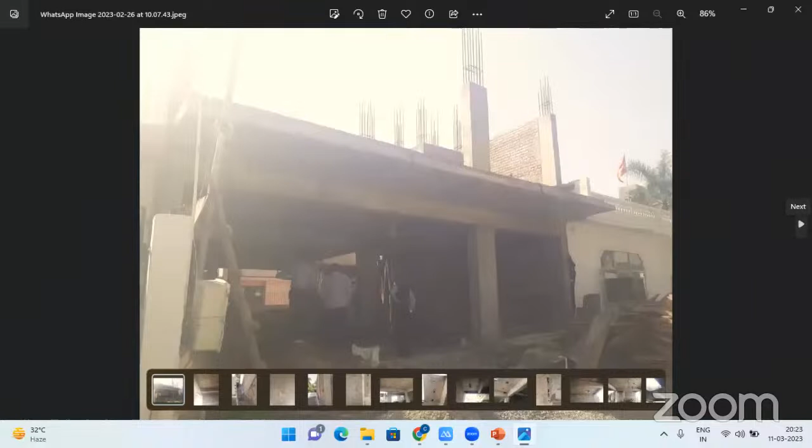Just sir, I'm showing one photograph, and you will not believe this building belongs to one of the directors. He's an IAS officer actually in the Ministry of Commerce, and this house belongs to him. And for the reinforcement, he once made a call to the SAIL director asking which would be better in the market. But whatever, sir, construction was done - he also hired one good contractor from Noida.

But you can see the quality - just showing you can see the reinforcement, it is totally exposed, so you can see the quality of the compaction of the concrete. Even M30 grade of concrete was used for only a G+2 structure. And you can see here the compaction of the concrete. Now, sir, you can see the hollowness in the reinforcement, and it is a column located in the column-beam junction.

And now, sir, I'm coming here, you can also see the condition of compaction of the concrete. This is, now I'm coming here, you can see the quality of construction in the shear zone, where the maximum mass is at the junction. You can also see the compaction of concrete in the shear zone.

And you can see the offset of verticality and plumb line of your column. So this is the condition of the column in junction.

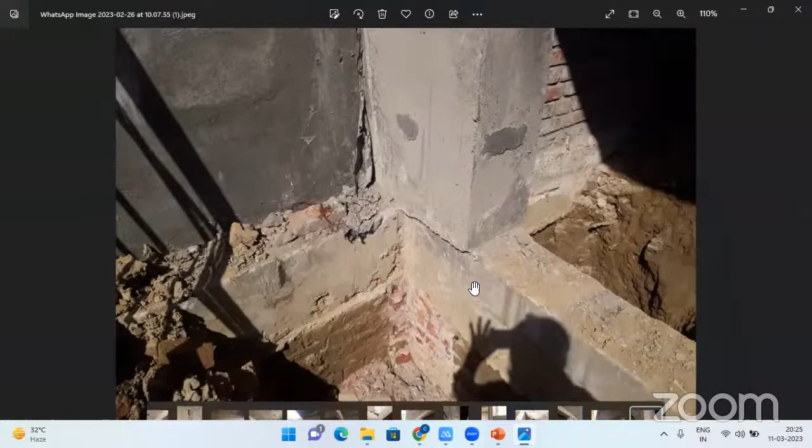And last, I'm coming at this position. There's a column here at the ground floor level. At the bottom, you can see they had put the brick. So when we had some doubt, I excavated that location, and even that column was directly resting on the plinth level.

And now, sir, that person, even he is powerful, but he has compromised to go with that same contractor after some modification in the building, some strengthening measures. They are ready to adopt the building. So this is the condition. It depends. It is not only you are going to decide the future of the building, stability of the building, life of the people.

Even sir, I'm going to show one very typical structure. You have heard about Sika, Fosroc. They are giving the repair technique for a lot of construction buildings, where most of the buildings are failing, crack or corrosion, whatever.

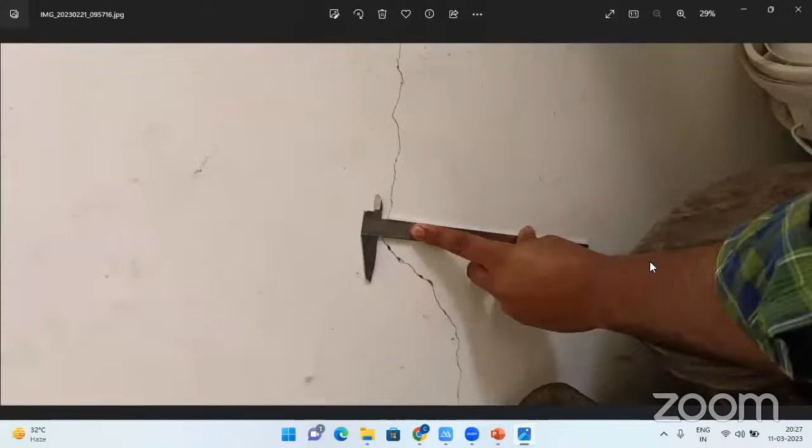Even their R&D area, I'm showing here. This is a shear crack in their R&D center. Sir, your crack between the beam and the wall, masonry wall. I'm coming here, a shear crack, and the floor crack. You can see the crack at the floor, the throughout crack in the masonry wall, and the width of the crack you can see here, and the crack along the beam at the top of the beam.

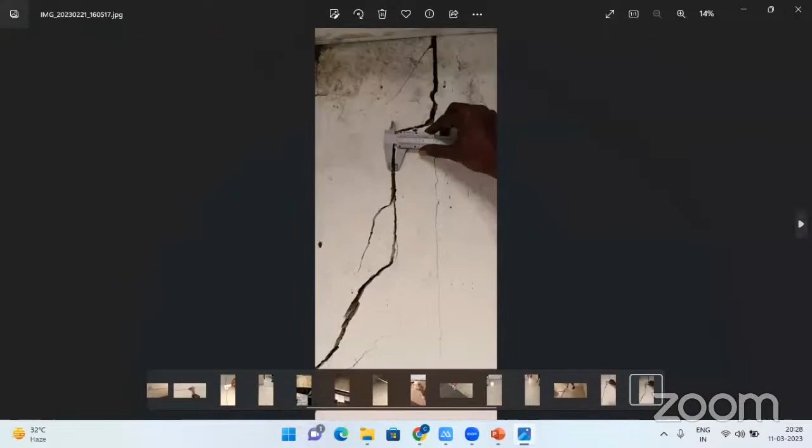You can see the crack in the floor, and shear crack in the beam also. Upliftment of the slab, you can see this upliftment here. And so you can see even the external wall and the outer wall, there's a lot of crack.

So, only even we are aware about the possible failure. We are aware about what kind of mistake will be done by the contractor or the designer, and even it is under execution or under repairs. Even then we can't certify with certainty that the building will be stable for seismic forces.

But yes, we can characterize the type of methodology adopted, type of construction technique they have adopted at the site, how much detailing, type of detailing they have adopted at the site, and what is the rate of failure, what is the rate of corrosion, type of failure visible in the building. That can definitely be characterized during the pre-disaster survey.

And when any kind of disaster occurs in any part of the world, we should visit that site and try to simulate which type and kind of material was adopted, and even check if that is okay as per the present code, why that building collapsed. That will give us the parameter, because whatever failure we check in a controlled environment will be different. Whatever parameter we check at the ground level, their behavior, the nature of failure will be totally different.

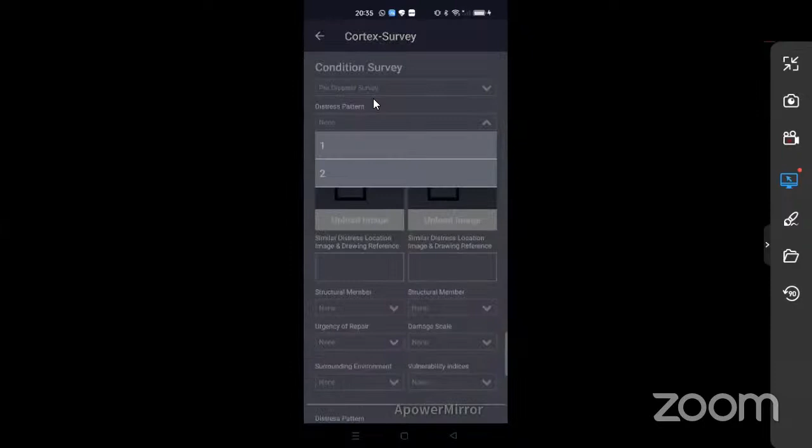So you can select the distress pattern, and for distress pattern you can take some photograph. For example, I'm taking this photograph - crack or whatever the corrosion. You can also give the details here. And similarly I can take from the gallery also - if you have some selected photographs in advance, you can take from here.

Now I am taking the type of the column - it is a steel column, or the type of member, it is RCC column. And urgency of repair - is it immediate repair, immediate load restriction, or immediate demolish - whatever you can select from here.

Now I'm coming to the damage - it is low, mild or severe, immediate failure or demolition. So you can also select the damage scale from here.

Now I'm coming to the environmental - it is moist or dry, mild corrosive, severe corrosive, exposed to fire, or exposed to some cyclone. You can select this as non-structural failure or structural failure. You can also select from here. Similarly, in one screen, you can take 4 photographs, so you can add according to your demand.

Just I'm coming here.

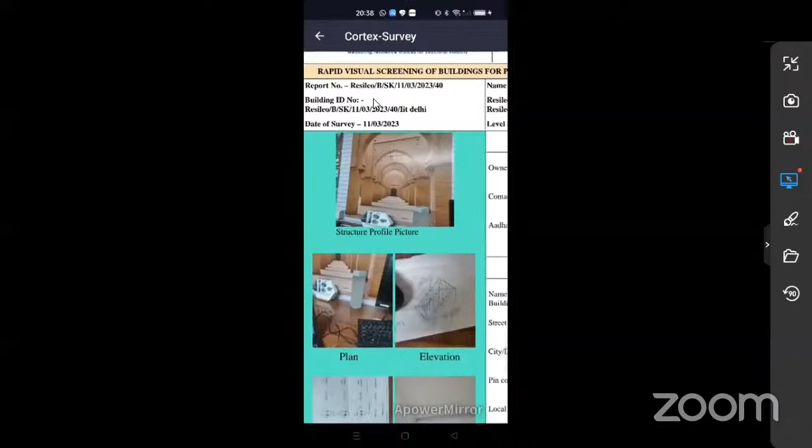So I have finished this survey, and when you have finished this survey, you can view the report. You can see here automatically that I have taken these photographs, and I took IIT Delhi, and then two questions I have attempted for this. And for technical information, rigid and flexible and RCC slab, I had selected.

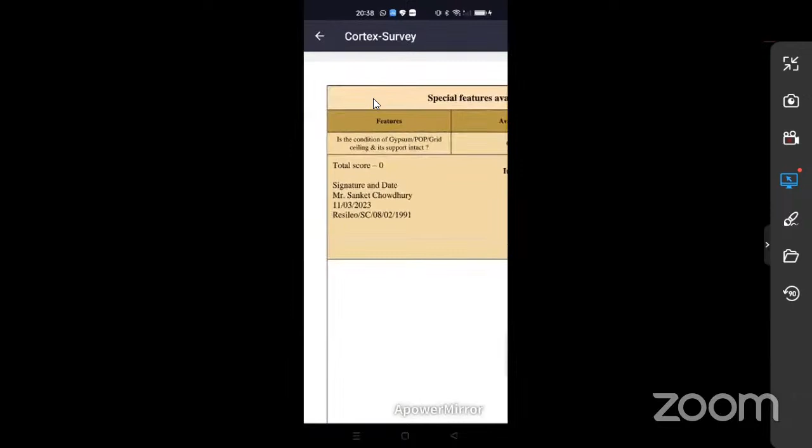Now for the disaster and even for the condition survey, I can automatically get the total score, how much signature, immediate action required, expert review required, comments in good condition, available grid, and so these are the condition survey you adopted. And this is restrict the load or the RCC jacketing or whatever recommended, that will come, and you can share that report through the mail. Also you can download the report and share it with your expert.

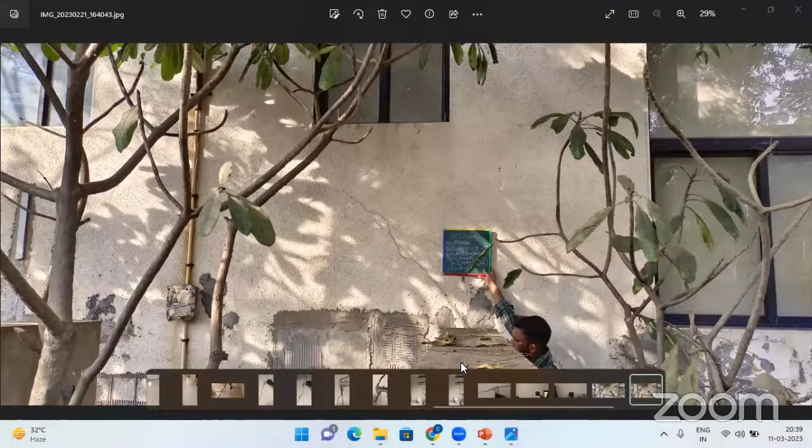So these ways you can generate a lot of data, and that data will be very beneficial for us. And this way, sir, we can generate a thumb rule for the inhabitant or the owner, or in the rural area where people are not able to afford a structural engineer or architect, and where our authority or technical experts don't have the reach to give such kind of services. So from the industry, we should transfer to the academic, and academic we should transfer to the policy maker and guideline maker. This is the best way we can improve our system and support those who are looking for some kind of solution from us. Thank you, sir.

Thank you very much, Manish ji. You have really shown some case studies with a lot of new ideas about structural auditing and health monitoring. It's a really good presentation and a way forward towards seismic vulnerability assessment studies.

I think we have come to the end of this program, and we can find a few questionnaires also from many of us. So I'm quickly going through some of the questionnaires for today's panelist. Somebody has remarked like this, Wesley Pereira, I think to Professor Kaushik. So I'll just take a few questions.